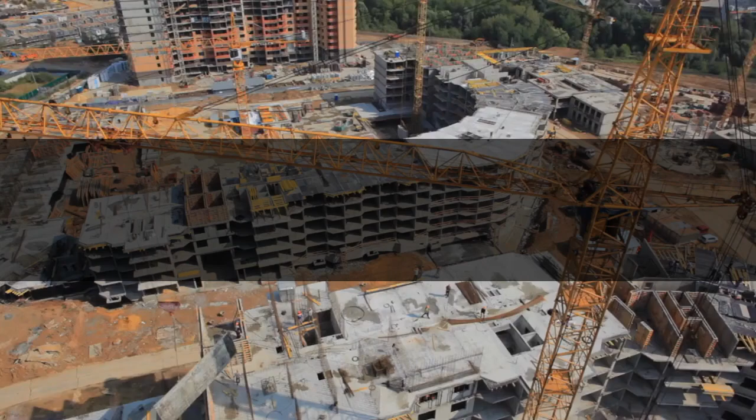The biggest construction failures in the world. Structural failures can happen for many reasons, but the results are often devastating. Ambition often outstrips reason when it comes to building. After all, who can resist adding their mark to the landscape of any city or countryside?

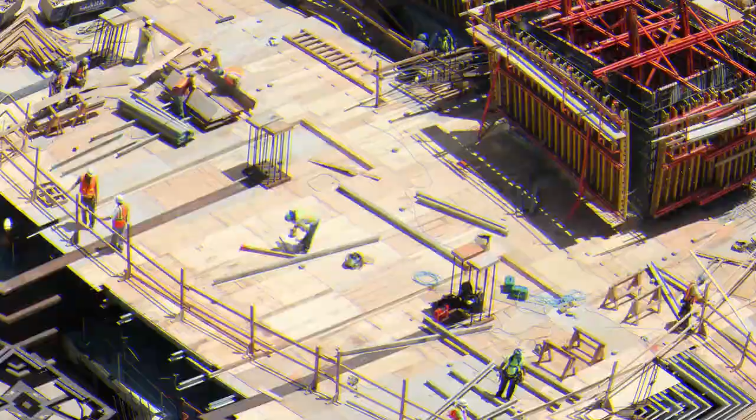Trying to achieve such a feat often leads to lasting glory, but it can just as often lead to truly disastrous blunders. Any number of factors might cause engineering to go awry. It's happened for thousands of years and continues to happen to this day. But sometimes the main factor is plain negligence or thinking about form over function in every area. Here are the 5 biggest construction failures in the world.

Number 5. The Sampoong department store, Seoul, South Korea, 1995. The Sampoong department store in Seoul was not always the building the construction company intended. Like the time constraints in the U.S. during the Hyatt Regency hotel collapse, South Korean construction companies were pressured to complete projects quickly and efficiently.

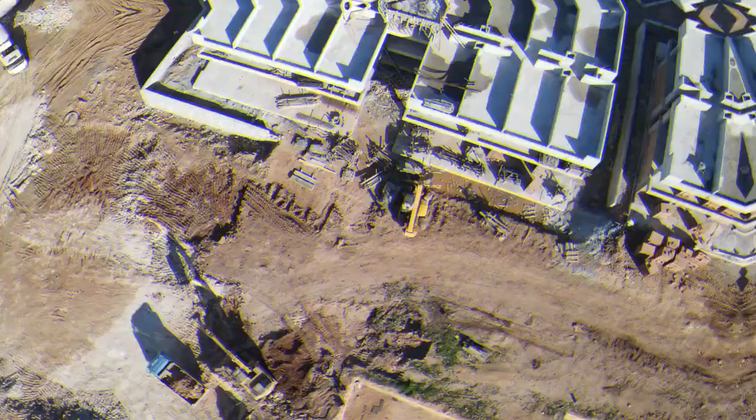This was partly due to the ruling of the South Korean government not allowing overseas construction companies to take on projects in the country, and partly due to trying to cash in on the construction boom that coincided with the 1988 Seoul Olympics. The Sampoong department store was initially intended to be a 4-story residential building, but when construction started in 1987, future chairman of the Sampoong construction division, Lee Joon, made a last-minute decision to change the blueprints to accommodate a large department store, a decision that would prove disastrous.

Structural issues are again to blame here, but these issues would not have occurred if the building had been constructed according to its original plans. The problem with turning the residential building into a department store is that several structural columns were removed to make space for the escalators that are commonplace in buildings of similar purpose. But this was just one of the many structural problems that the building suffered, even in its foundations.

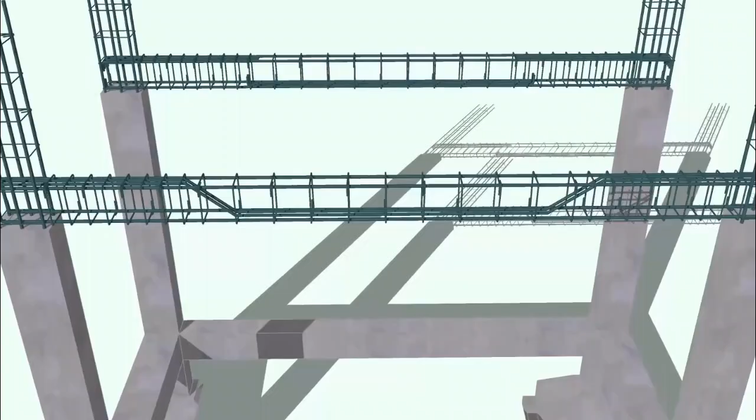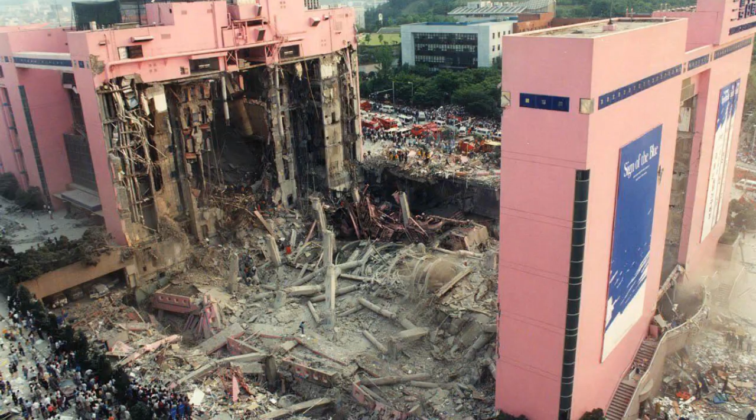The building was constructed using flat slabs of concrete with no structural framing or crossbeams, meaning there was no way to safely distribute weight evenly across the floors of the building. The original blueprints created by Woosung Construction Company called for supports in the building to be at least 31 inches thick to ensure the building would stand safely. But after this suggestion was made, Joon decided to fire the company, and it was decided that Joon's own construction company would take on the job instead.

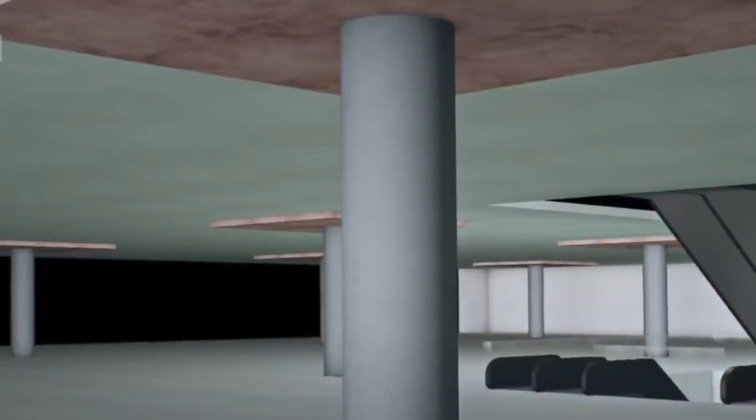Jun ordered for the columns to be reduced in thickness and spaced further apart to maximize retail space. Another careless decision that further meant that all building floors could not hold the weight of not only the people in the building, but also the floors above it. More poorly thought out decisions followed, including 45-ton air conditioning units that put the design limit of the building over by 4 times, and a 5th floor extension that was against zoning regulations.

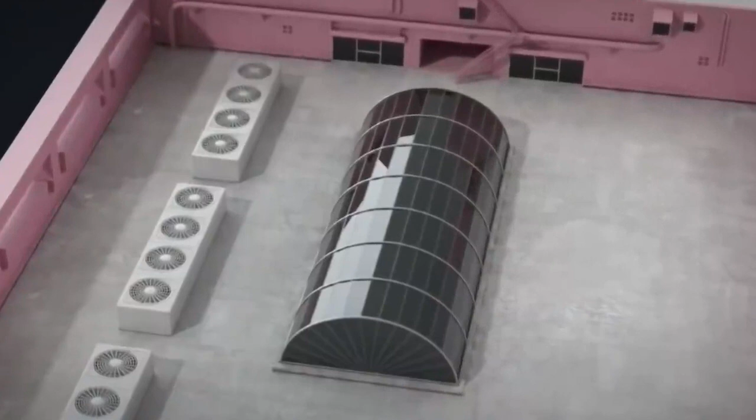The Sampoong department store was officially open to the public on July 7, 1989, attracting around 40,000 people a day. The combination of the amount of people visiting the building every day and the building's countless structural issues led to the collapse of the building on June 29, 1995. Cracks were starting to show in the ceiling of the 5th floor in April of that same year due to dragging incredibly heavy air conditioning units across the delicate roof of the building, and the vibrations made by these units caused these cracks to widen at an alarming rate.

These cracks increased over the coming months, but Jun and the management of the store did little more than close parts of the top floor off to customers. The building was not closed down, and evacuation orders were not followed until 5 minutes before the building collapsed, but by that time it was too late. The dangerous actions carried out by Jun and the construction team resulted in a disaster that's been named one of the biggest non-deliberate building collapses of all time. Lee Joon was put on trial, charged with criminal negligence, and sentenced to 10.5 years in prison.

Number 4. Hyatt Regency Hotel, Kansas City, United States, 1981. Construction on the grandiose 40-story Hyatt Regency Hotel began in 1978, a project that was described as fast-tracked due to the financial climate at the time, putting pressure on construction companies to win contracts and execute projects quickly and efficiently.

The project suffered from major issues early on, including the collapse of a large roof section, a foreshadowing that went unnoticed. The hotel officially opened in 1980, with many admiring its sleek and modern design and architecture. One of its defining features was the hotel's lobby, especially the steel, glass, and concrete walkways, 2 of which were directly on top of each other, connected several floors of the hotel. However, these walkways would prove to be the construction's downfall, literally.

On the evening of July 17, 1981, many people were gathered in the hotel's lobby and packed onto these walkways for an event that was taking place. Because of this, guests on the 4th floor walkway started to hear popping noises before the walkway fell several inches, paused for a few moments, then continued to fall to the lobby floor, taking the 2nd floor walkway down with it.

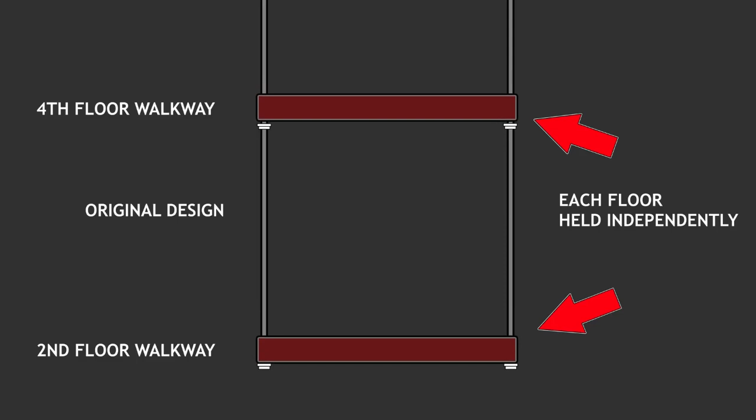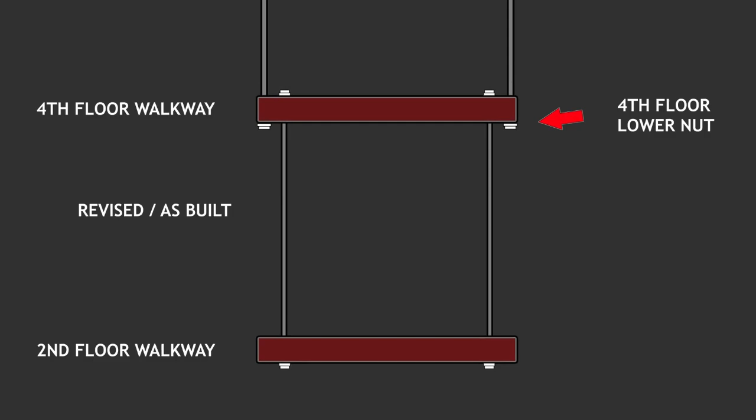The cause of the collapse was a result of a change in the design of the walkways during the project's construction phase. In the original design, both the 2nd and 4th floor walkways had their own support systems, only needing to support their own weight. This would have been effective, but the design was changed so that the 4th floor walkway would be responsible for holding the weight of both, which it was clearly unable to do. An investigation into the incident concluded that this issue would have been easily recognized if the proper checks had been performed before construction began, but due to severe miscommunication between project managers and manufacturers, these checks were not carried out.

Number 3. Versailles Wedding Hall, Jerusalem, Israel, 2001. When Keren and Asaf Dror planned their special day, this would have been the last thing they expected to happen when a large portion of the 3rd story of the Versailles Wedding Hall collapsed. The culprit of this collapse was identified by wedding guests moments before the incident. They noticed a significant sagging in the floor of the 3rd story before it crumbled and fell to the ground. The wedding celebrations took place solely on the 3rd floor with 700 guests in attendance. So clearly, the floor could not handle that many people at once.

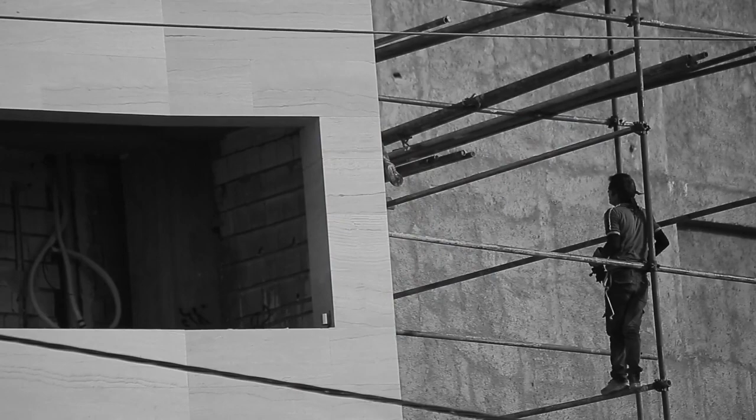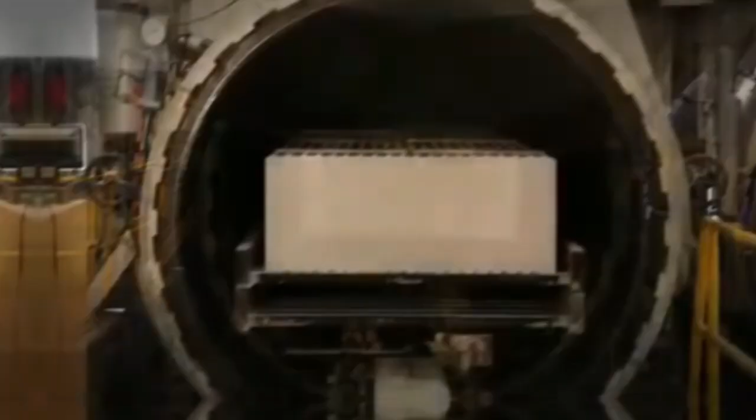If you're thinking it's not every day a floor sags and collapses, that's because the construction method used to develop this particular building proved to be so dangerous, the practice was banned. The Pal-Kal method of construction was based on the process of creating lightweight floors and ceilings from metal plates and cement, an extremely cheap option that proved popular in the 1980s.

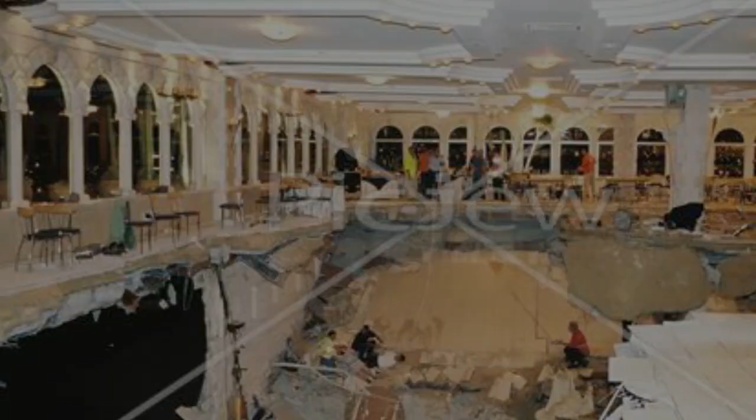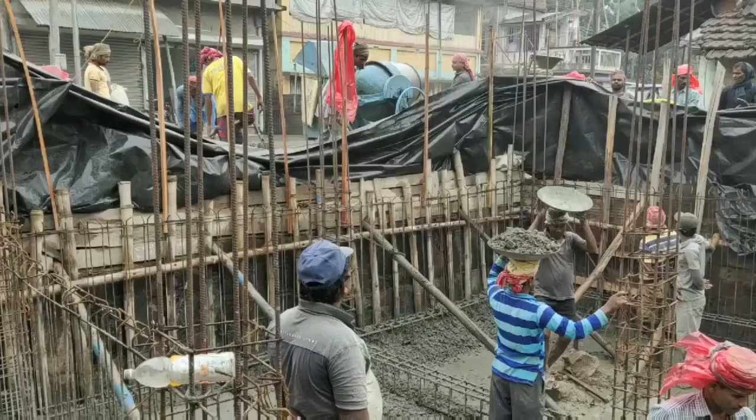This was not the only cause of the collapse. When the building was designed, only one side was designed to accommodate a 3rd story. However, a last-minute design change resulted in both sides of the building having a 3rd story. As well as this, the building owners decided to remove the partitions, resulting in an even weaker structure and the subsequent floor sagging. A major oversight on behalf of the owners, referring to the sagging floor as a cosmetic issue, allowed Keren and Asaf's wedding to go ahead just weeks later, resulting in the collapse. The PAL-CAL construction method inventor Eli Ron was arrested and charged with manslaughter in August 2002 because he sold the defective materials to the construction company that built the wedding hall.

Number 2. Vdara Hotel and Spa, Las Vegas, United States, 2009. One of the few structures in this video that is still standing, the Vdara Hotel and Spa in Las Vegas presented its own unique set of problems based on the design of the exterior of the building.

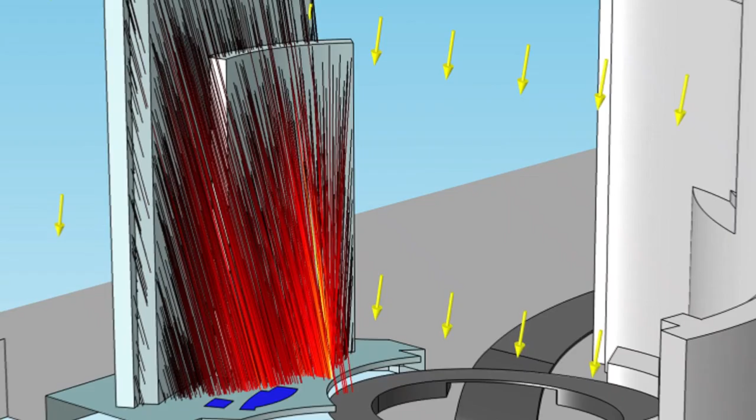In 2010, a whole year after the hotel was built, it was discovered that the combination of the building's reflective surface and curved design acted as a collective mirror that reflected the sun's rays into one beam of intense light and heat. Unfortunately for guests, that one beam happens to present itself in the middle of the pool deck of the hotel. Often referred to as a death ray by everyone from hotel staff to news outlets, this issue has caused some issues that wouldn't occur in a stay at a typical hotel.

Guests relaxing by the pool would be regularly singed by this ray of intense heat, with one guest even reporting that it melted a plastic bag he had with him.

The hotel management has taken as many steps as possible to prevent more issues caused by the design of the building. While no solution will be 100% effective due to the constant movement of the sun, according to the time of day as well as the changing of seasons, management has taken it upon themselves to install large umbrellas to try to deflect the rays directly off of people, as well as covering the glass with a non-reflective film.

Strangely, the architect behind the building, Rafael Viñoly, has a history of designing buildings with this particular issue. The walkie-talkie skyscraper in London, also designed by Viñoly, is now commonly and comically referred to as the Walkie Scorchie and Fryscraper, after reports that the building reflected light so intensely that it would melt cars and people could fry eggs in its path.

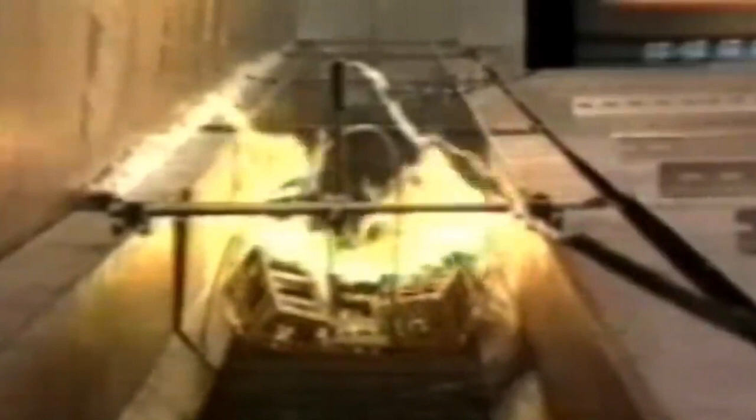And finally, number 1, King's Cross Escalator, London, United Kingdom, 1987. King's Cross Station is one of the major interchanges in the London Underground system, serving 6 out of 11 lines currently in operation on the Underground. As many as 150,000 people pass through the station every day, which is why the fire that occurred on the Piccadilly Line escalator on November 18, 1987, was a dark day for the City of London.

The fire occurred around 7:30 p.m. on the evening of the 18th at the tail end of rush hour. Several passengers reported a fire underneath the ascending escalator connecting the Piccadilly line platform to street level. Due to the placement of the fire, it could not be put out using standard fire extinguishers, and staff at the station were not trained on how to use the more advanced equipment available to them at that time.

A few minutes after the fire started, firefighters arrived to the blaze that was about as big as a cardboard box, and they thought it could be quickly extinguished with a water jet. However, a combination of physics and bad luck meant the situation was about to get worse. At 7:42 p.m., less than 15 minutes after the small fire started, the entire escalator was up in flames, further fueled by the enclosed space and the burning of around 20 layers of paint that was topped up during the refurbishment of the escalator tunnel.

As the situation progressed, around 3 minutes later, the fire would escalate again in a way no one had ever seen before. At 7:45 p.m., the flames shot up the escalator and into the ticket hall, filling it with a blistering heat and toxic smoke. This unexpected turn of events resulted from a phenomenon known as the trench effect. When any fire occurs on or beside an inclining surface, this incline causes any material above the initial fire to heat up. This chain reaction causes the gases that form to auto-ignite, resulting in rapid escalation of the fire.

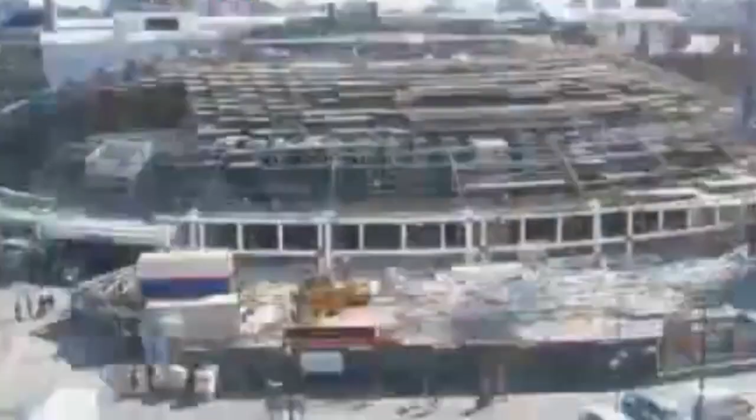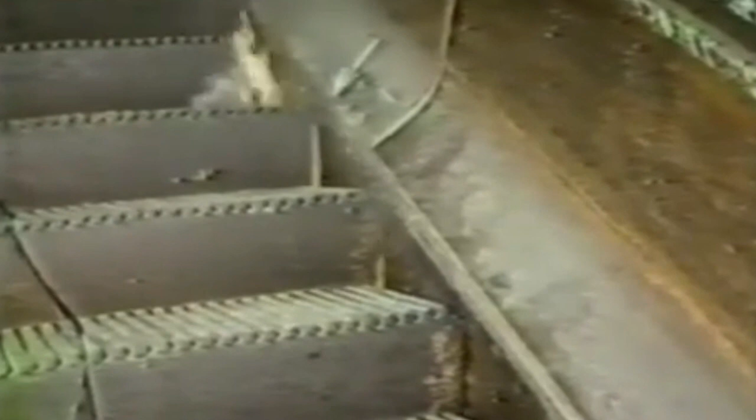The investigation into this case was unlike others in this video due to the complicated physics of the incident. It was established relatively quickly that the initial ignition was started by a lit match discarded on the escalator, but it was not clear if the fire was started intentionally and how the fire escalated as quickly as it did. It was later established that the match was discarded after a cigarette was lit on the escalator. Even though smoking on the London Underground was banned in 1984, people still choose to flaunt the rules and light their cigarettes on the escalator as they approach the exit.

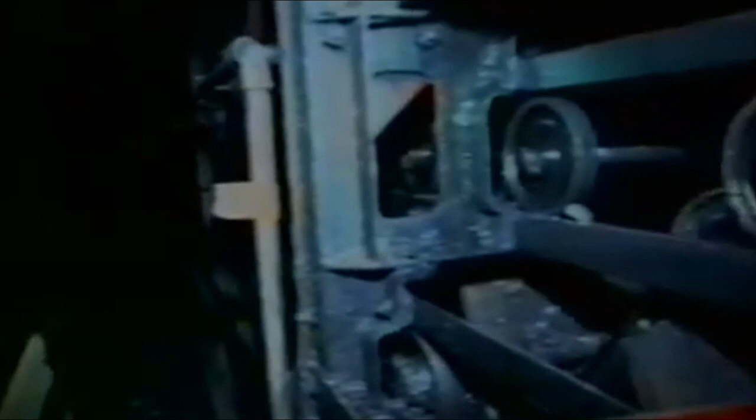However, even the grease buildup under the escalator would not have been enough to create a fire of that size and intensity. Upon further inspection, debris under the escalator's tracks was found to be easily ignitable when computer-simulated tests were conducted. Until the fire, escalators were made with a combination of wood and metal, and it's pretty well known that the wood is flammable, so in the wake of the incident, work was carried out to make the escalators entirely metal. However, even after this terrible incident, the last wooden escalator was not replaced until 2014 in Greenford Station in Greater London. And there you have it.